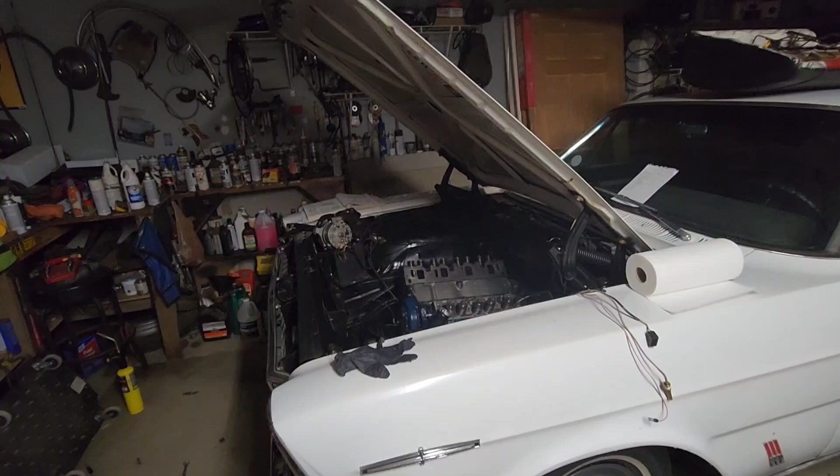Today we are working on my 1966 Ford LTD, getting it ready for Power Tour. In the last episode, we ripped apart this engine bay down to the long block. In this one, we're going to start putting it back together.

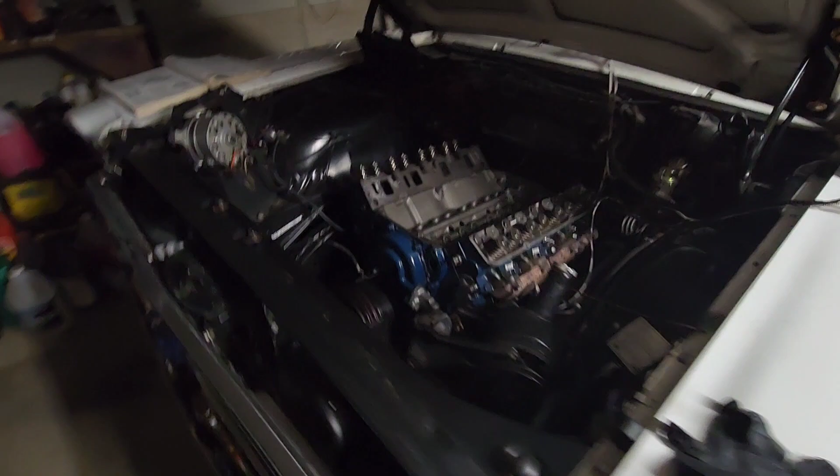Up until now, I've started cleaning this engine. I got a bunch of the oil off the front. I also took the intake out and detailed and cleaned that up a little bit. I'll show you that in a little bit. But for now, let's get started.

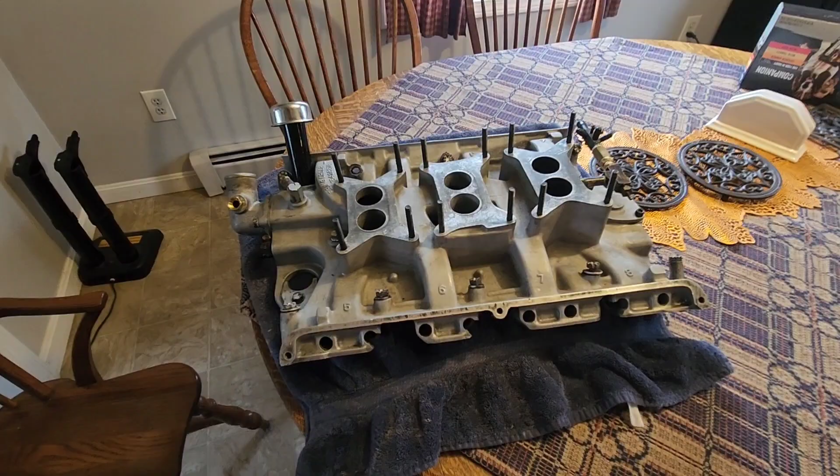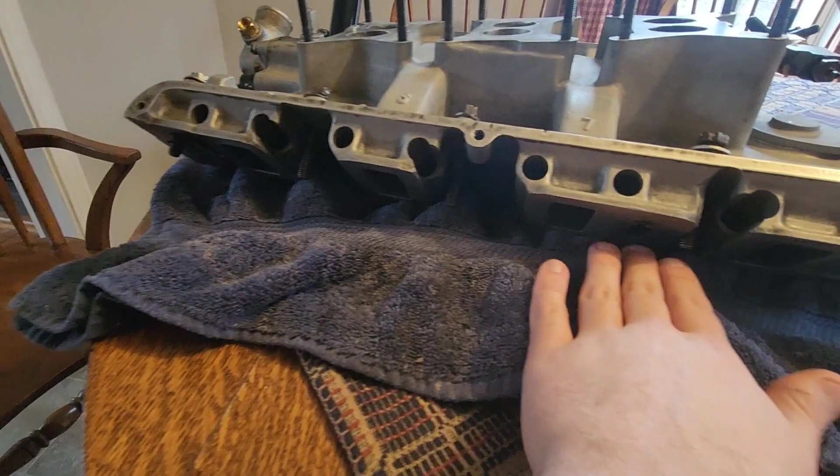So earlier today, I took some time and we went over the whole intake, cleaned it up, and just gave it a quick once over. Started out by coming outside. We cleaned up all the mating surfaces across both sides, passenger side, driver side, and the lip front and back where it sits on the block against the valley.

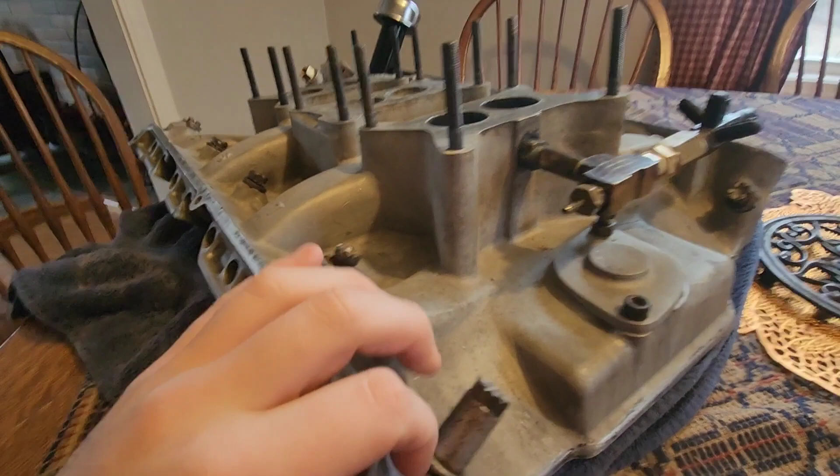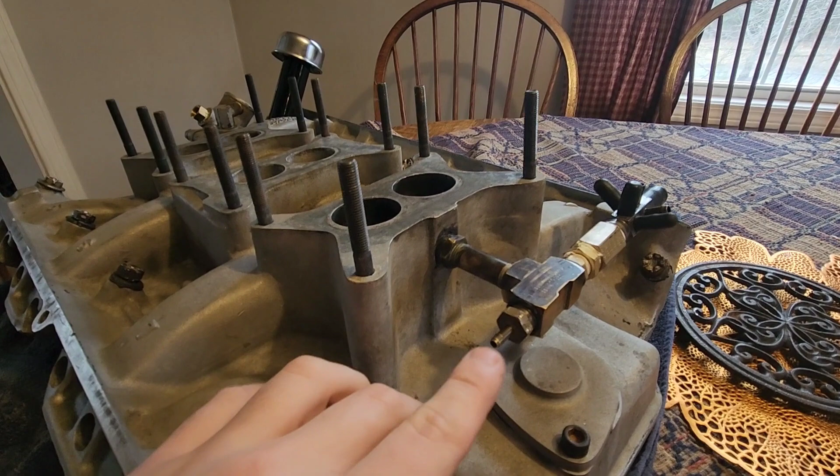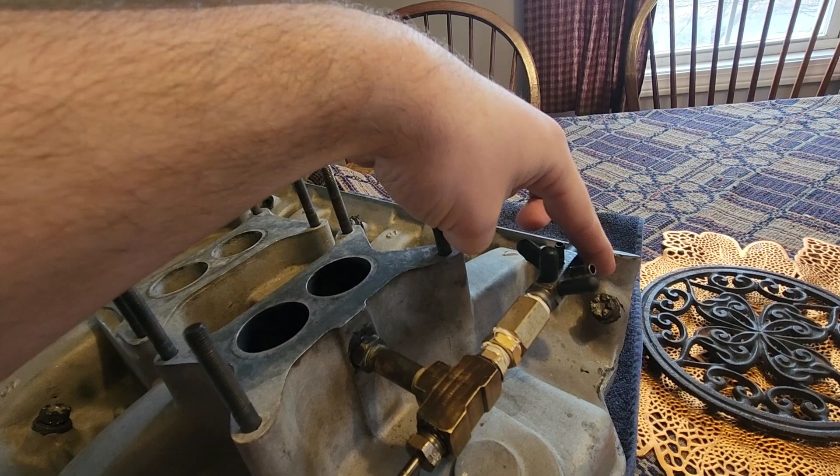While it was off, I noticed that there was some staining back here. I've since gone and cleaned it off, but it was obviously fuel and oil residue. So a lot of it was coming from this fitting up top. So this is a factory threaded port on the intake, and I have a tree coming off that. So this nipple here goes to my distributor vacuum advance down the side, and then over here I have one for my accessories, and one goes to my automatic transmission.

And then this cap here is where you would have an optional, like a PCV breather. And normally if you just have one fitting, you'd loop it in. But I have a second spacer here that I put the port on because it was drawing too much vacuum off this one for my accessories to run. So we stacked it, we got a 1-inch spacer, and then I have a fitting here. My valve cover will sit here, and then there's a cap on the side with a line. It's actually in the back. The cap right here with the line that comes over, and it feeds in for my PCV.

So we got that all cleaned up. I re-gasketed this. This one was leaking, but to take it out I had to take this off and this off. So while those are off, I resealed those as well. So these are all sealed now.

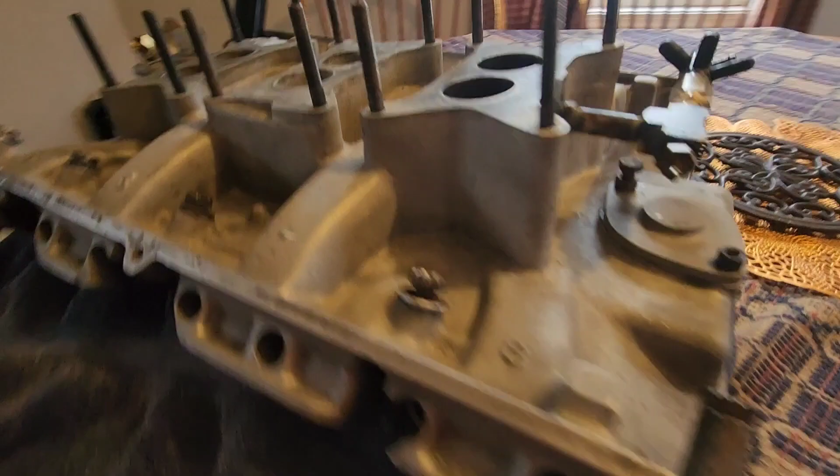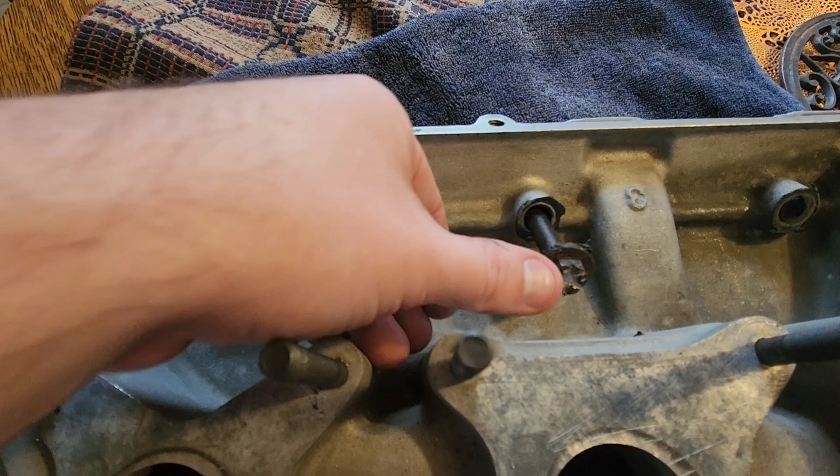They shouldn't leak. A trick an old timer taught me on intakes in general: you got bolts that hold your intake on, but those bolts go through to the other side, as you can see, and oil can come back up through these and stain your intake, which might have been what happened here. I'm not sure exactly. Regardless, you can take a dot of RTV or silicone or whatever you use and put it on the end of each bolt or washer, and it'll seal against that and keep your engine sealed and keep anything from coming back up and out.

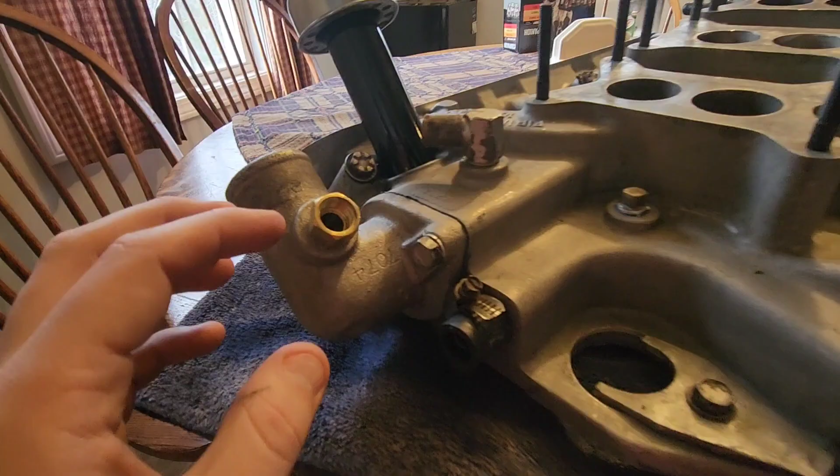Oh, almost forgot. Threw a fresh coat of paint on my oil fill. So this is just black enamel, self-leveling. Good gloss to it. So like I said, this is good, ready to go back on now. So sooner than later, this will make its way back onto the engine.

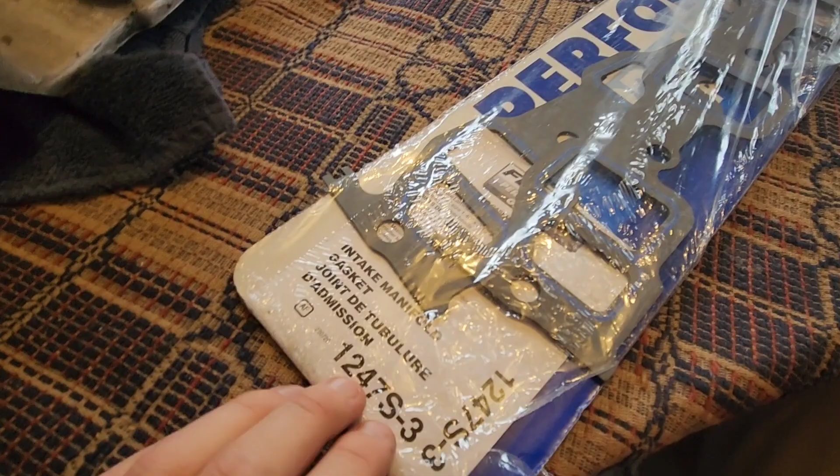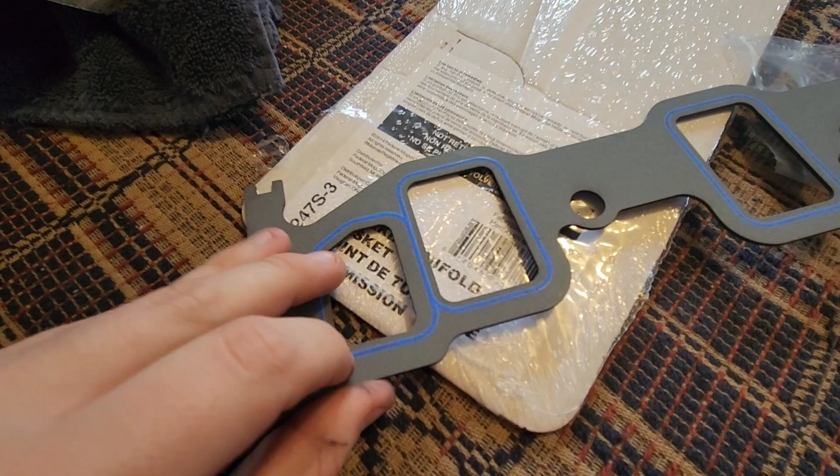This is what I will be using for my intake gaskets. It's a Fel-Pro Performance part number 1247S-3. These are steel core gaskets. You can see the cross section in there, if I get this to focus. And they have a little silicone bead around each port. So they'll go in there, they'll squish, and then this should help in sealing everything off.

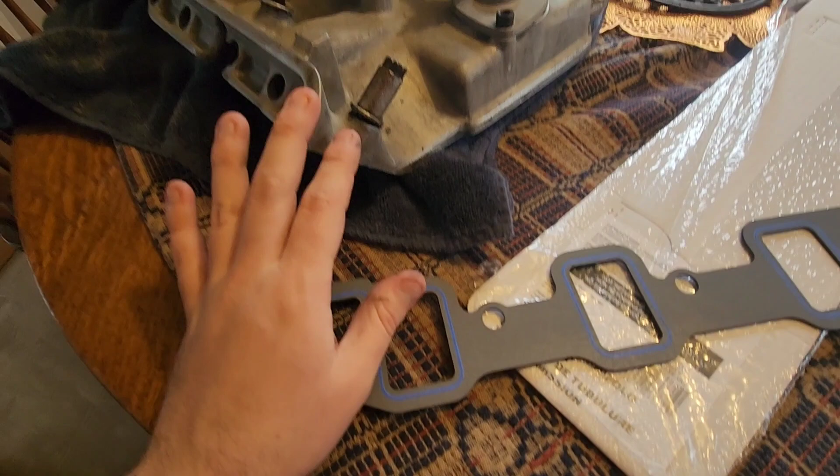When I was cleaning this off on the sides, I was investigating why we had a leak, and I think it was on the intake side of the gasket. It was bubbling up between the intake and the gasket up through into the oil. So I just put a leveling coat of a Performance RTV sealant, and this should seal it against that now. So hopefully we don't have any issues going forward.

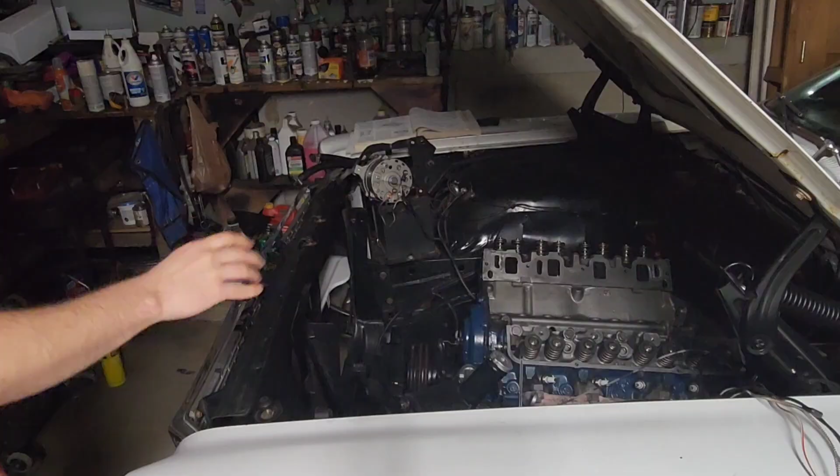I don't know if you remember, but when we pulled the intake off, a lot of water came out and went everywhere. So I have to do an oil change on this before we really fire it off. Before we even start assembling though, on all of my lifters, I'm going to put a dollop of engine assembly grease. That way when we start this, we don't have any dry starts. Main reason being, I wiped everything down clean, soaked up all the water and oil that was spilled. So this will protect those at least before we kick this off.

Next, we've got to put our valley pan on. I always forget which way this goes. I think we'll try this way. That looks right. It fits in the back against the notches and the front's open so you don't interfere with the distributor.

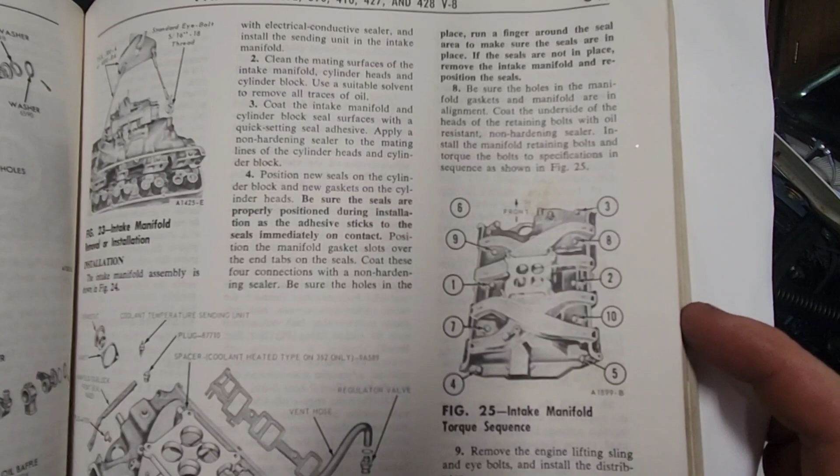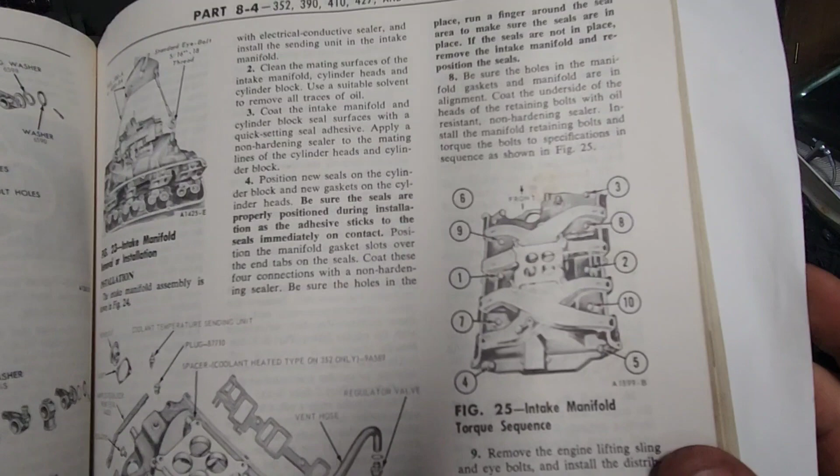So here it is. So you go center passenger side, center driver side, and then etc., 1 through 10 until you get everything spec'd. I started at 20, then I went to 25, and then 30. Kind of do a sequential tightening, with the intent being that you're following this pattern and evenly compressing the gaskets on either side in that silicone bead. So there you go.

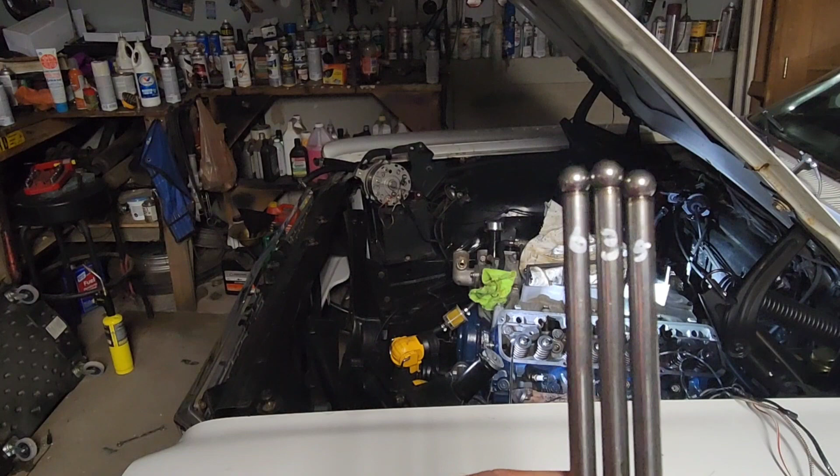I don't know if you can see those. I mentioned before, label all your push rods. And there you go. So the numbers are all on the top, and then each number has a spot. Driver's side is 1 through 8, passenger side is 9 through 16.

With these, it's tough to know when they're actually lined up in the bottom. So what I do when I push them in is I feel, I line it up, and then if I give it a little tug up, I can feel the lifter come up with it. I know it's seated and locked in to its spot in the lifter. So.

Now I'm also going to go and put a dollop of the grease on all of these, the valve tops and my push rods.

And then, as mentioned before, I put a zip tie on my passenger side rocker arm. No zip tie on this one, so it's the driver's side. And then obviously when you put these on, make sure that each of these sits into each machined little bevel in each rocker arm assembly. Almost forgot, there's a little valley pan under each one of these.

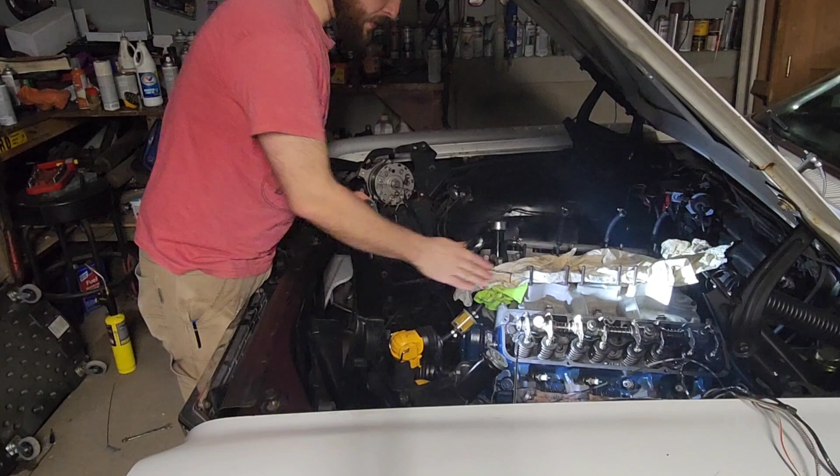Now when you put your rocker arm assemblies on, there is a solid rod that goes through all of these. So you don't want to just tighten one down and then tighten the next one and the next one. You want to kind of hit each one evenly with even pressure so you don't bend anything. So I'm going to go like 2 cranks on each until it's all snug down, and then I'll torque it.

Here's where we're at. We've got our intake on, we got our push rods all in, we got our rocker assembly all on, torqued. I'm waiting on my water pump gaskets to show up, and I'm waiting on valve cover gaskets to show up. That really limits us to what we can put on right now. Technically I could put the carburetors on, but I'm afraid to put those on with the valve covers open right now. So I think for tonight, I'm going to hold off until something else shows up.

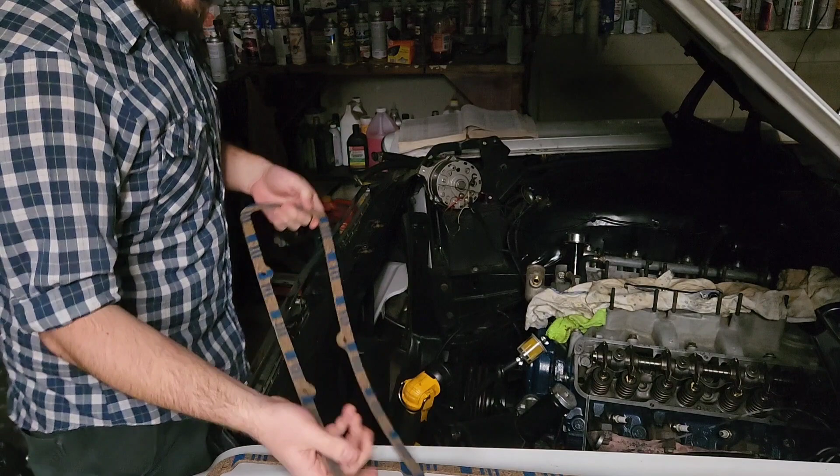So it's the next day, and my valve cover gaskets showed up. So we can start putting this back together on the top. I'll put these on. I'm going to put a little bit of silicone RTV on the top mating surfaces here just to really seal them in, and then I'll go and put my carburetors on and maybe the distributor. So let's get started.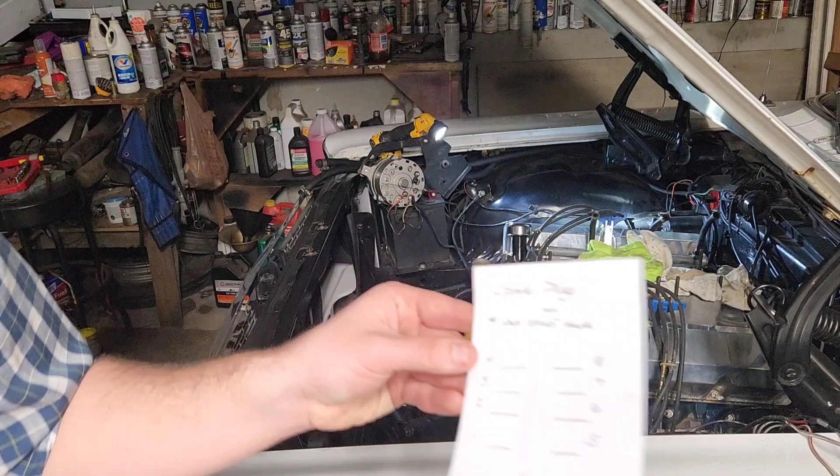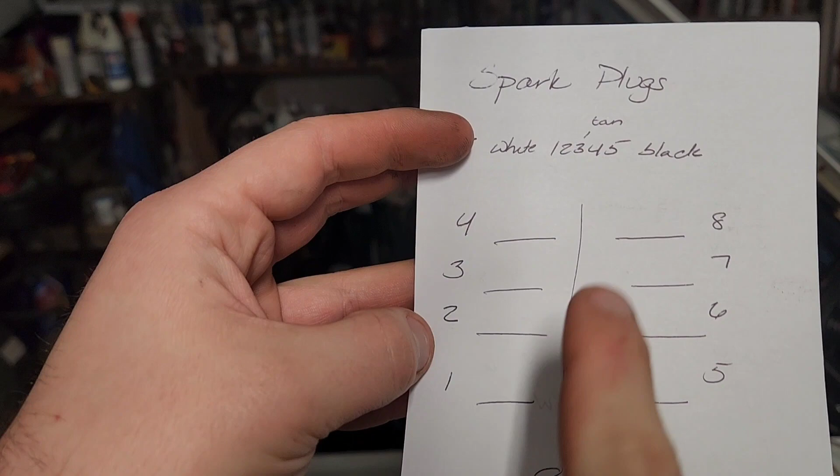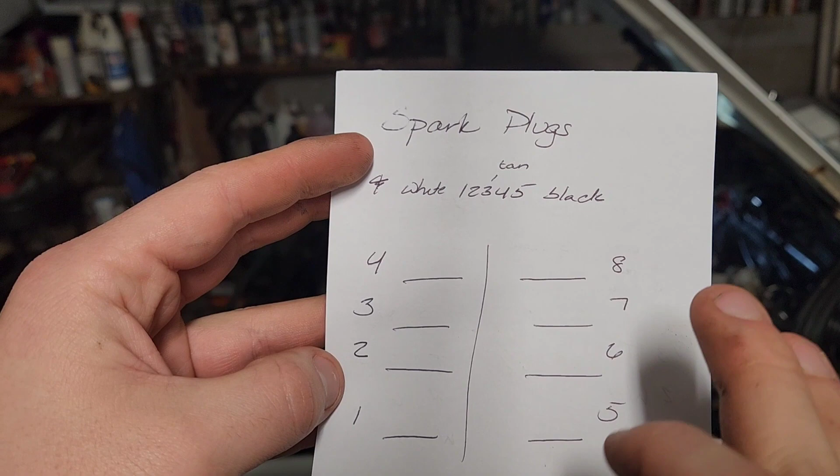and I create a scale from white to black, 1 through 5, and I have my cylinders all numbered 1 through 8, with the front being the fan. And as I pull each spark plug, I'll rate it, where 3 is my perfect fuel mixture, so it'll be running nice and tan. 1 is one extreme of being white, not enough fuel. 5 is the other extreme of being blackened or sooted out from running way too rich. And then I can figure out what jets need to go where.

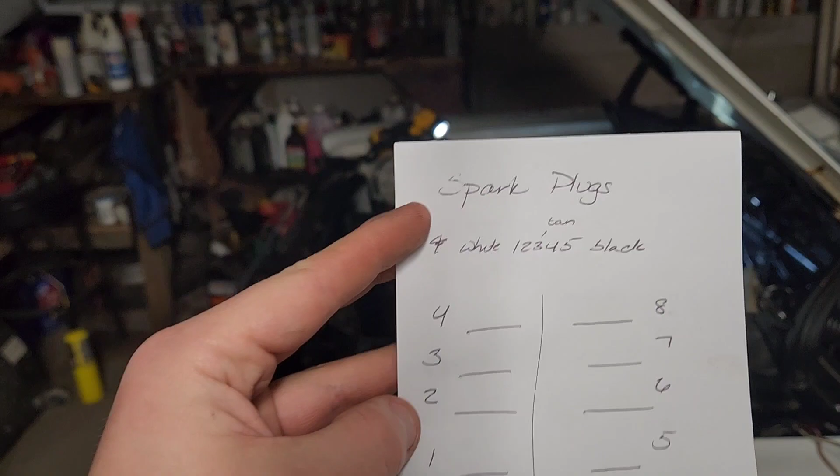The way these tri-powers work, your middle carburetor is like half of your pedal. So as you're coming up from idle, giving it gas, you're running on just the middle carburetor. And as you get deeper, from like 50 to 75%, I think, don't quote me on this, the back one opens first, and then from 75 to 100, where you get wide open throttle, your front one opens last. So your center carburetor plays the biggest role in how all your spark plugs are doing.

And then this affects the back ones more, this affects the front ones more. So to lay everything out and see how it's running is a good way to figure out where it's at and where you have to make adjustments. So that's my little trick.

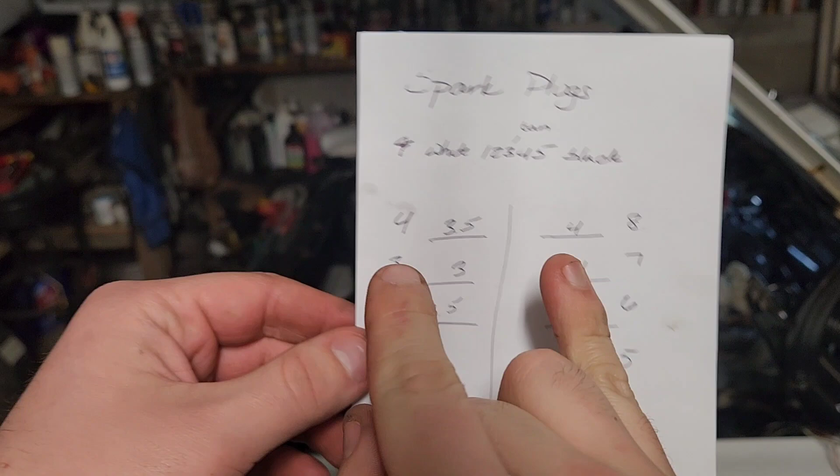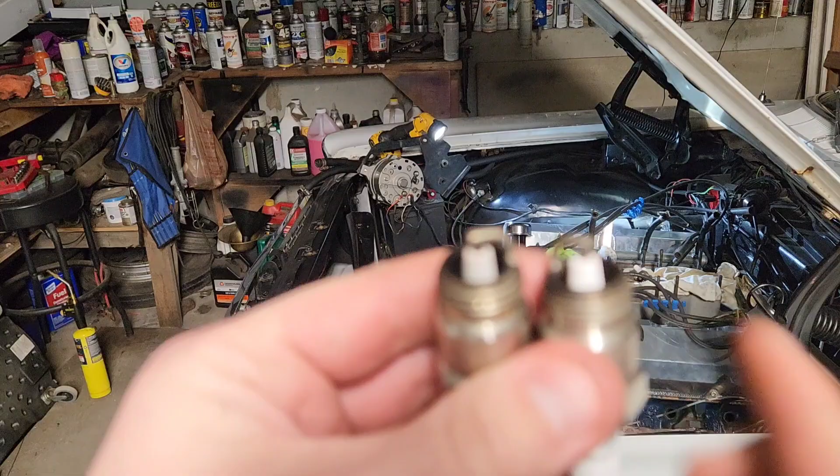So here's what we're seeing. On the whole, we're a little bit rich, but not bad except for the front. My front plugs were like snow white. I'll show them to you real quick. Take a look. These are like brand new. Never been run pretty much. This one's maybe a little dark. Maybe that would have been like a 1 1/4 instead of a 1. But on the whole, extremely lean compared to the others.

So I'm going to upsize the jets in the front carburetor, so that way we're getting more fuel in the idle circuit in the front all the time. And the back ones I'm going to leave the same for now. Once I run this more and have it tuned, I'll have a better idea of where it's at. These plugs are still pretty fresh, so it's tough to know for sure. But these front ones definitely need to come up for now. That'll be a good starting point. So I'll do that, and then we'll throw these carburetors on.

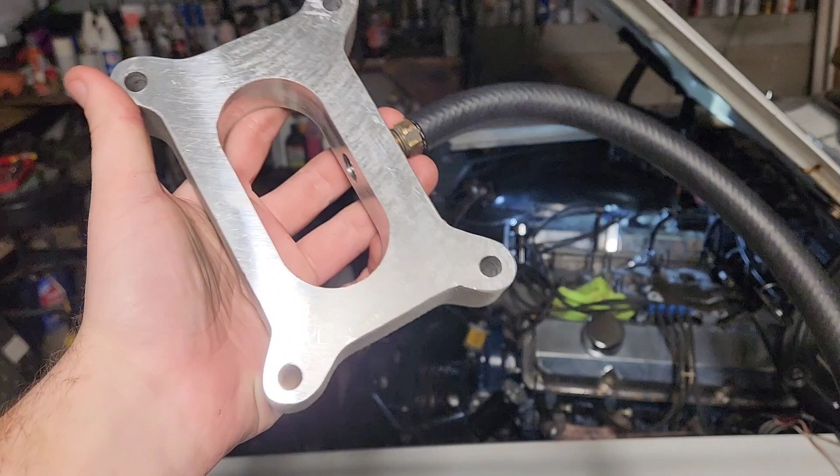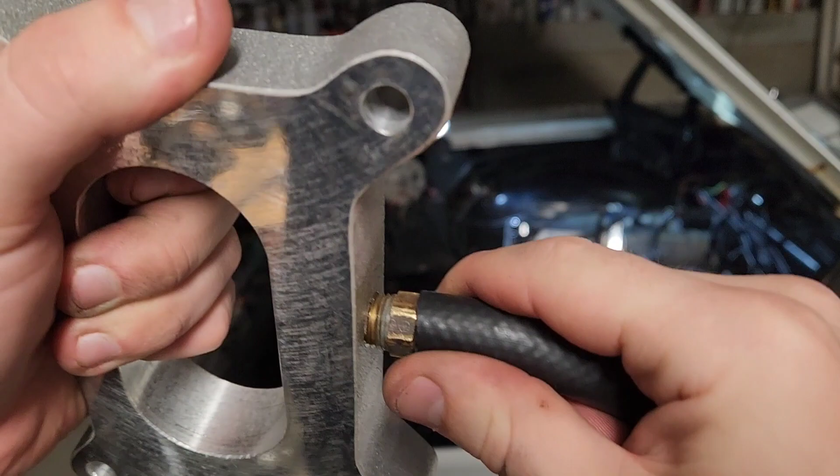This is that aluminum spacer I had mentioned earlier. This has a drilled and tapped hole in the back with a spline fitting on it that accepts this hose, and then this sits under the carburetor, and on this end it wraps around and hooks to that PCV valve. So that's our PCV system.

I know I mentioned it when I was filming the teardown episode, but I don't know if I kept it in the final edit. So you'll notice these little flags I put on the front and back carburetor. You probably can't see it from your angle in the lighting, but this one has a 1 on it, this one has a 3 on it. I labeled these because they are jetted differently, front and back. That's why I was able to know which one was the front and which one needed the bigger jets when I saw the spark plugs.

So again, even though they look very similar, they are not the same. So you can't just pop this one and put it there and vice versa. So note.

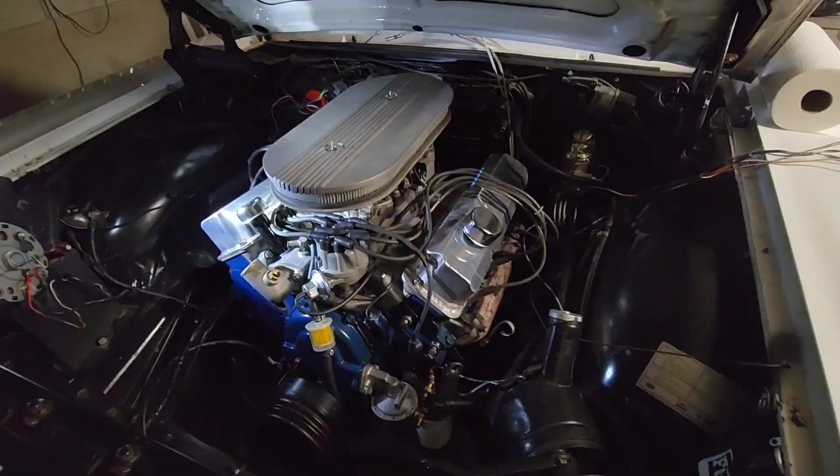Well guys, I think we're going to wrap it up here for tonight. I just went online and checked. It looks like my water pump gaskets have a couple days before they'll be here. So we're going to pretty much leave it where it sits until those come in. So got the intake on, like we said. Rocker arms are all in. Carburetors are all on, tight. Our air cleaner is on, so nothing will fall in now.

So now it's just a waiting game until everything shows up and we can put our water pump on and alternator and power steering pump. So we're going to wrap it up here for tonight, probably for this episode too, and follow up later when everything else comes in.